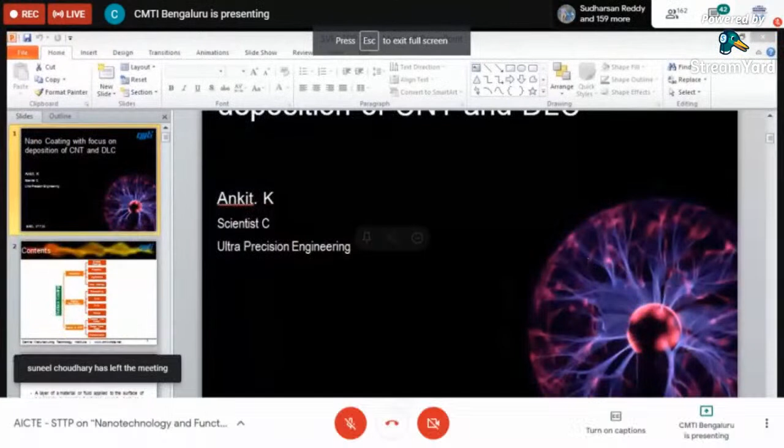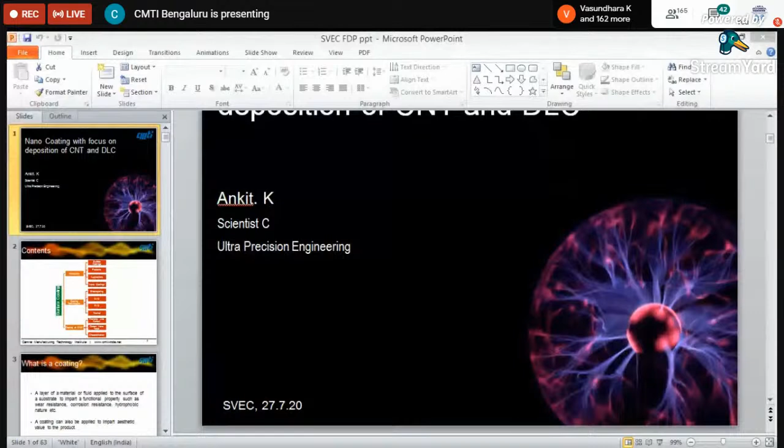Ankit sir, we are getting your presentation. Sir, we are able to see your presentation, sir. You can proceed, sir. Yes, sir. We are seeing your presentation. Go for full screen, sir. Full screen, shall I go? Yes, sir. Go for slideshow, so that it will be big. Now is it visible? Yes, sir.

Really sorry, we had to change the computer. There was some issue with the computer. Okay. Thank you, sir. Once again, I'm extremely apologetic for this sort of issue. Please don't curse me, because I know it's afternoon and we've had a good lunch. So anyway, without much further delay, let me start my presentation.

This is a presentation I gave a few weeks ago on a similar platform at your college. Thank you very much again for contacting me. This time I decided to go with an additional focus on the deposition of carbon nanotubes and diamond-like carbon. Graphene is the in thing, but on a mass production scale, CNT and DLC are actually at the forefront, more than graphene. And the applications that CNT and DLC have promised are a lot.

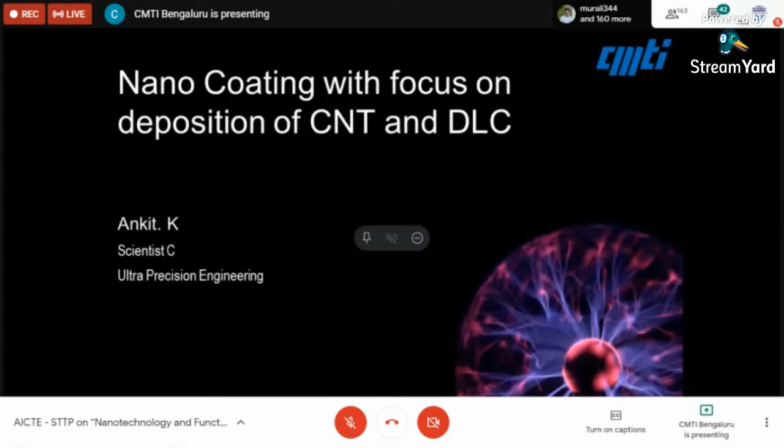DLC is now used in so many domains, right from high performance car engines to even a tiny thing like a screw, or machine tools. So these are the two things which we work on in our laboratory here, and I thought it would be ideal if I'm able to share with you my secret recipe of how to synthesize CNT and DLC.

So shall I start with my presentation? Yes, sir. Please carry on, sir. Please. Thank you very much.

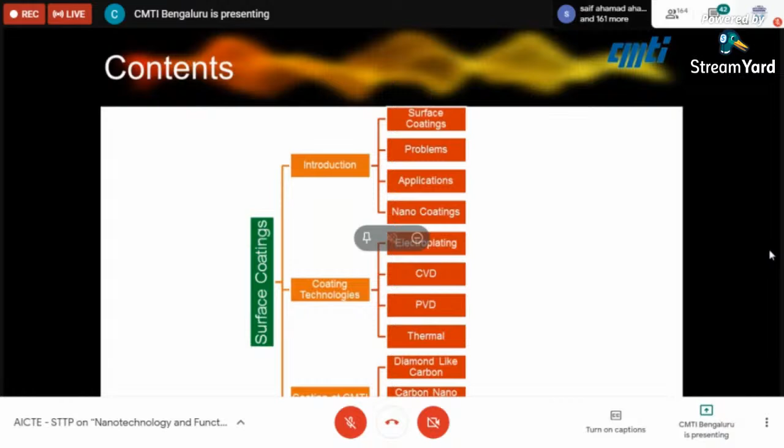So I'll be going with what is surface coatings, some sort of problems, applications, then why nano coatings are required, different technologies, and what sort of work that we do, especially with respect to DLC and CNT. So I would like to focus on this.

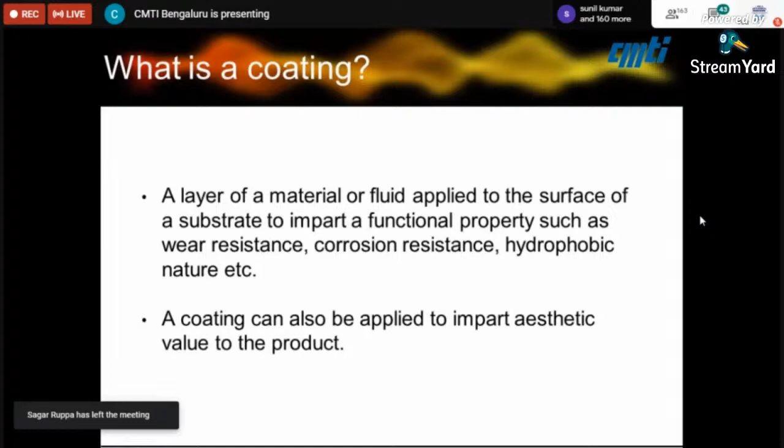And first of all, what is a coating? So if you apply any sort of material to a surface which gives you some sort of a good property, that is a coating. And it's as simple as that. Any thin material which is thinner than the substrate would be a coating. And coating forms a large part of a subject called surface engineering.

So surface engineering is basically a kind of science which deals with modification of surfaces in order to achieve a particular sort of chemistry, or a particular sort of physical property, or some sort of mechanical property which is essential for our final application. So the whole goal of surface engineering is modification of surface.

So let's say you want to make a surface quite smooth in order to improve the coefficient of friction. So that is one sort of property, and that can be used in bearings. Let's say you want to do a laser etching to get hydrophobicity. So that is another kind of property that you would be achieving using laser etching.

Or if you want to use plasma and bring about small modifications so that you can have some sort of cellular growth happening on the surface of a material, that is another kind of modification. So basically in all these three cases, you're modifying the surface, and hence the whole subject being defined as surface engineering.

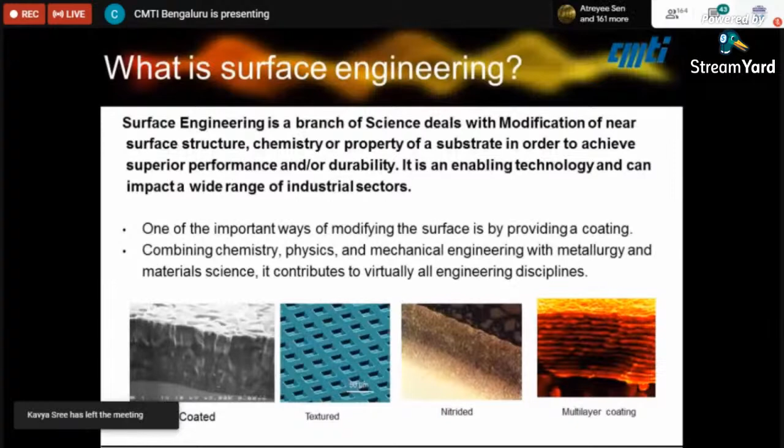So what advantages are we talking about? We're talking about improved corrosion resistance, improved oxidation or sulfidation resistance, improved wear resistance, reduced frictional energy losses, improved mechanical properties, or let's say delaying the fatigue or enhancing toughness,

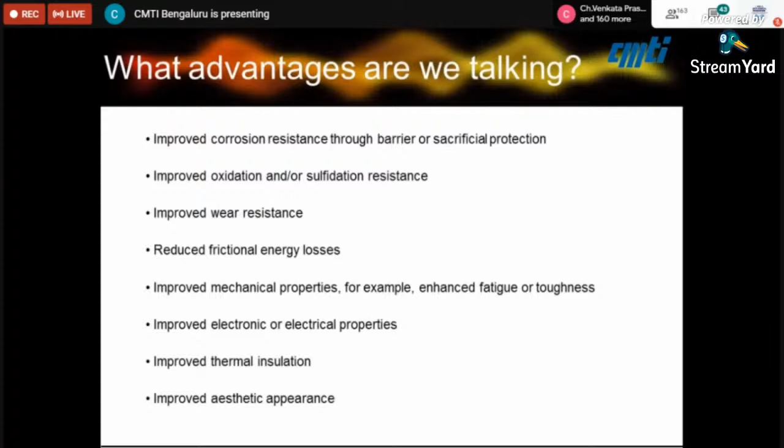improving the electronic properties. Let's say if you're able to engineer a very good band gap material using thin films, that's something very advantageous. Thermal insulation can be given, and improved aesthetic appearance.

Why does the surface actually damage? That is essentially because we expose it to various kinds of environments: chemical, thermal, environmental, and mechanical. Let me take an example of a race car, right? A Formula One car. What happens in a Formula One car is that your engine is a very high performance engine. The heat that is generated is very high.

So let's say the engine piston rings have to be coated with some sort of low coefficient of friction coating. At the same time, it should be able to withstand a lot of heat. So that is one way to have that. Then there is also a lot of wear and tear in parts. If you have seen a 50-lap race, you will find out that a lot of parts and components are being changed in an F1 race.

And that is because you have wear, you have abrasion, you have friction damages, so you change a lot of parts there. And sometimes there are certain races that happen in rain, and when it happens in rain, you have a problem of water in a lot of parts of your chassis or your wheels, between your brakes and your drums. So these are other issues that you will have problems with. So all these things can be sorted by coatings.

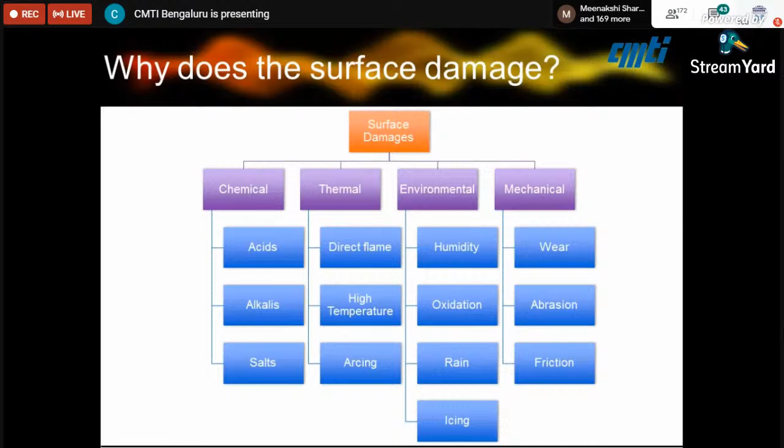And then in medical, there's a lot of work that goes on in body implants. And then you have the textile industry with thread guides, winding spindles, flattening rolls. And there are even certain guideways which use this. And transport also, as I told you. So there are a lot of places where coatings are useful.

And this is one small slide which shows you the different kinds of coating and the different regimes they are used in. Just to give you one example, welding, which is slightly thicker in nature, is used essentially in ship repairs. When you are at sea, you weld, take out material there, and then you apply it. Thermal spraying is very prevalent in aerospace turbine blades.

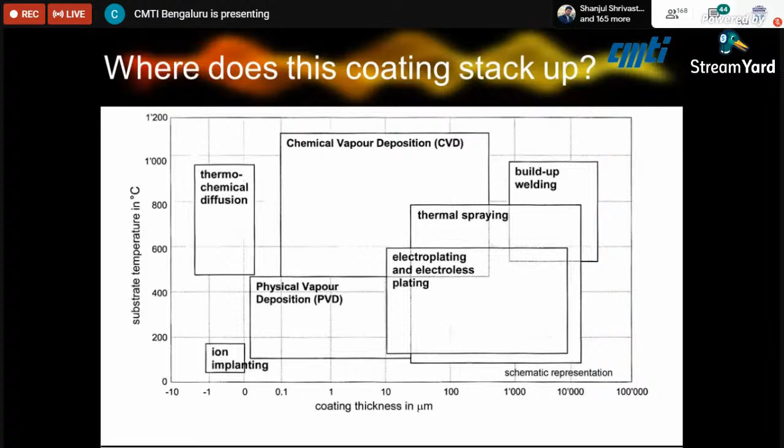So what are nanocoatings? Nanocoatings are coatings that are produced by using some components at nanoscale to obtain certain desired properties. You can make crystalline coatings. You can handle individual layer thicknesses. You can change the grain size, grain boundaries, play with it, and then create an interface which will then impact your final application. You can try adding a defect, or you can try removing a defect, which is very useful in making N-type or P-type semiconductor systems.

And then you can make a coating chemically inert, physically strong, those sorts of things. And you can actually make certain coatings which are kind of super coatings, which are not typically found in our conventional day-to-day life.

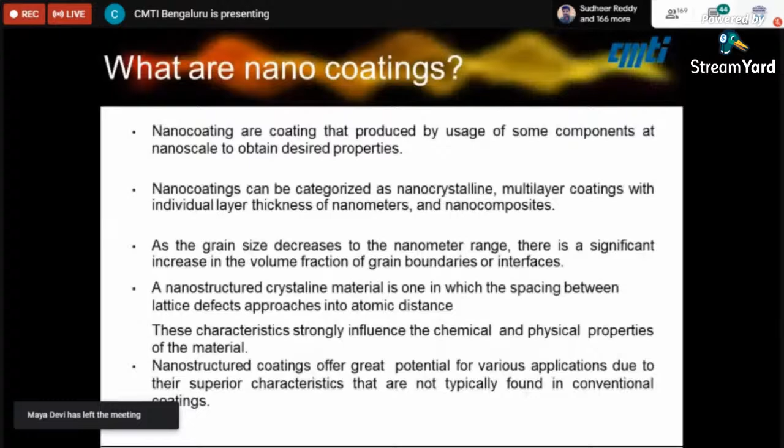So here is a small difference. One is a micron scale structure, one is a nano scale structure here. So I wouldn't go much into high contact tension. Today, though contact tension is reduced, you can improve your water repellence effect. You can also make it hydrophobic in nature, and then moisture can penetrate the housing because you'll still have certain gaps.

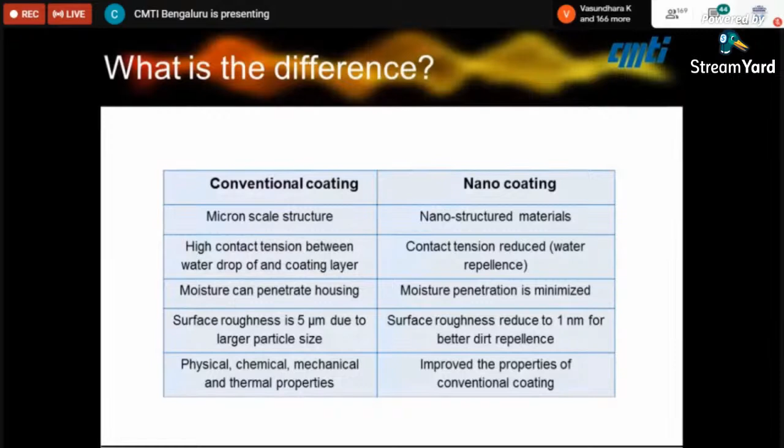Whereas in nano coating, it is atomic bonding or molecular bonding, and hence it's minimized. Minimized is actually an understatement. It's almost eliminated. Surface roughness, yes, you can reduce not only to 1 nanometer, it can even become a few angstroms. And conventional coating is slightly thicker. It goes up to even 150 micrometers in aerospace applications. And then you have the improved properties of conventional coating fields now.

So electroplating, we'll go with the oldest and time-tested one. What is electroplating? Electroplating is one process wherein you have a cathode and you put it in a bath, a solution wherein the workpiece is plated with another metal through a water-based electrolytic solution. So the metal ions are transferred and deposited onto a cathode. So it dissociates at the anode and then it goes and attaches itself to the cathode.

So you can do a lot of things. You can do a variety of shapes. The only drawback is that the disposal of the electroplating solution after it goes bad is very, very hazardous. You can do it on complex shapes, but when you do it on complex shapes, you actually have to sacrifice uniformity of coating. And as you know, hexavalent chrome plating is now being banned in the country.

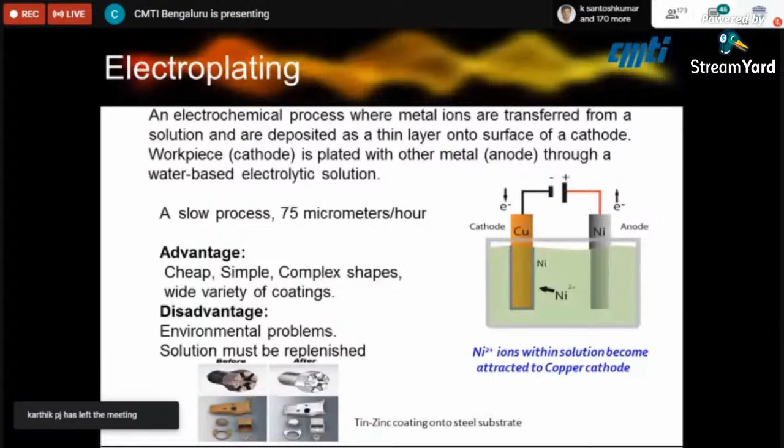So then comes the next generation plasma enhanced chemical vapor deposition. Now this is important for our talk today because when I talk about deposition of DLC and deposition of CNT, it is going to be using plasma enhanced chemical vapor deposition. So let's talk about what is CVD.

CVD, as I told before, is used in deposition of non-metallic and metal organic films. You can do several kinds of coatings - optical, super hard coating, protection, aesthetic - all usually deposited using CVD. So when I say gold color on watches, it doesn't really mean you coat titanium nitride or gold. There are certain chlorides you can use, gold chlorides or some sort of chlorides. But nowadays people have resorted to titanium nitride, which is deposited using PVD.

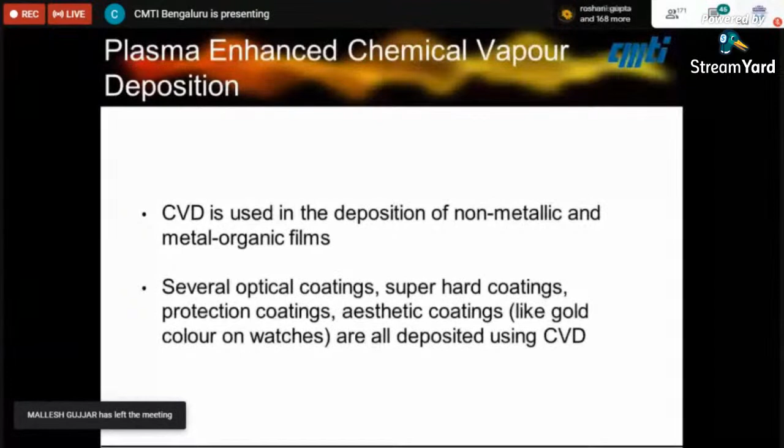So this is something which I've explained today, and that would be: first you have a chamber. Any CVD chamber, unless it's atmospheric pressure, would be in vacuum. You extract air from the chamber to the order of 10 to the power of -6 millibar and above.

Using either a cryogenic pump or a turbomolecular pump, which is backed by a roughing pump. When you use a roughing pump, it kickstarts your turbomolecular pump, and in turn, the turbomolecular pump can achieve very high vacuum. Once you achieve very high vacuum, you evacuate all the gases, including dust. So let's say if your coating thickness is about 500 nanometers and you have a dust particle of about 2 micrometers, then it's not going to serve the purpose. That's why you should go to very high vacuum.

And then later on, you have a plasma source. The plasma source for a PECVD is either a pulse DC, an RF, or a microwave source. You use a pulse source and plasma source, and then you generate plasma when you inlet certain process gases. With that, the gas enters into this vacuum chamber, and when the plasma is switched on, the gas starts dissociating. There is a chemical reaction which occurs, there is a dissociation that occurs, and then slowly these things start adhering onto the surface of the substrate. So one by one, they start adhering onto the substrate surface, and then they have a molecular binding in nature, and that's how you start depositing the material that you wish to do using a CVD process.

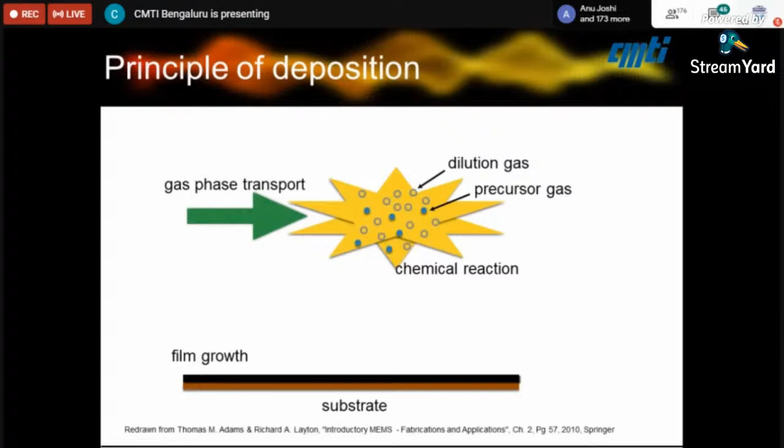Atomic layer deposition is a more finely controlled chemical vapor deposition, and it actually offers more precise control in terms of deposition, as it goes down to a few angstroms to a few hundred nanometers with much precision and very good uniformity. So the difference here is you would be using a lot of liquid-based precursors, which is then vaporized, and then you would be doing it. Of course, there are different machines having different setups, but technically speaking, atomic layer deposition, as the name states, is used for very, very low thickness deposition and is very useful in a lot of semiconductor applications.

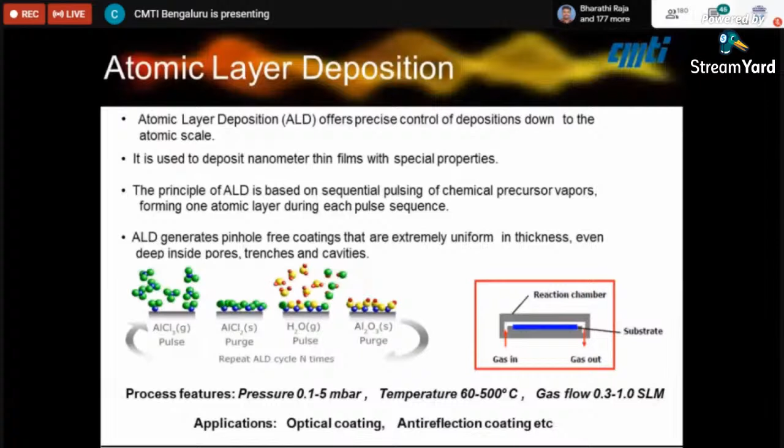Now, physical vapor deposition. All the cutting tools, metal-based ceramics, metals for temperature sensors, or maybe chromium for some sort of coating for protection, aluminum for mirror applications, are all deposited using physical vapor deposition technique.

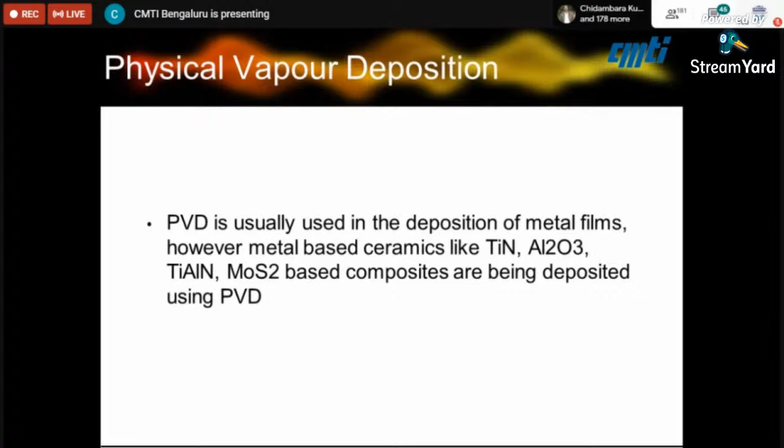Basically, one very famous methodology of physical vapor deposition is magnetron sputtering system. So you have a target, and what happens is you put in some sort of gas inside. The gas is ionized, and it bombards the target. The target etches out material, and this etching out of material in very, very small scale is called the sputter off phenomenon, and this sputtered off material falls on the surface of the place where you wish to coat, and then that happens to be a sputtered process PVD.

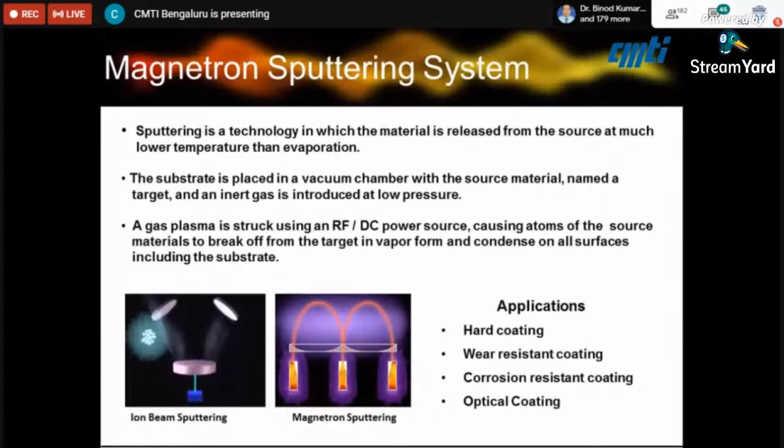As you see, the applications on the slide are for hard coating, wear resistance coating, corrosion resistant coating, and also for optical coating. So the principle of coating is something which I've already explained - you actually try to eject material from a surface using some means possible. When you eject that material, that ejection of these sort of atoms is called the sputtered atoms, and the whole process is called sputtering.

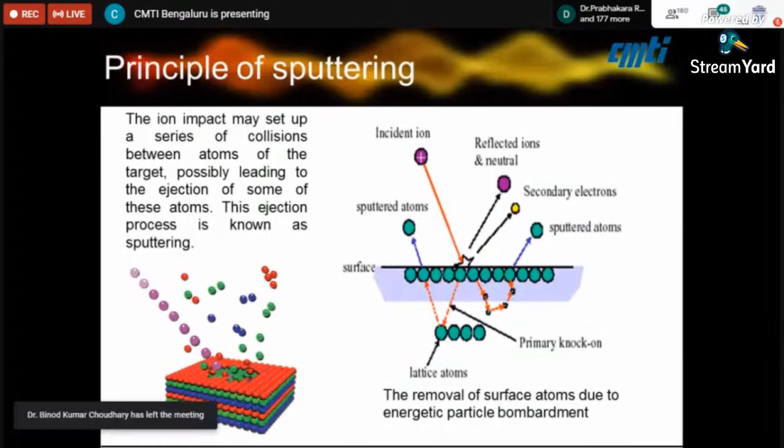This you will be able to simulate using either a molecular dynamic simulation, or some sort of Monte Carlo simulations can be used to find out the sputtering.

So the schematic is also pretty much similar to PECVD, or I should say they are anyway a sort of vacuum system here. The only thing is the difference in the plasma source. There you were using an additional plasma source of microwave. Here you would use DC. So that's the only difference. The rest, both the plasmas are going to be the same.

And you use specifically argon. Maybe you can use oxygen for creating an oxide, and nitrogen for creating a nitride. So this is reactive sputtering, but argon becomes your principal gas for letting into the chamber for creating a sputtering reaction.

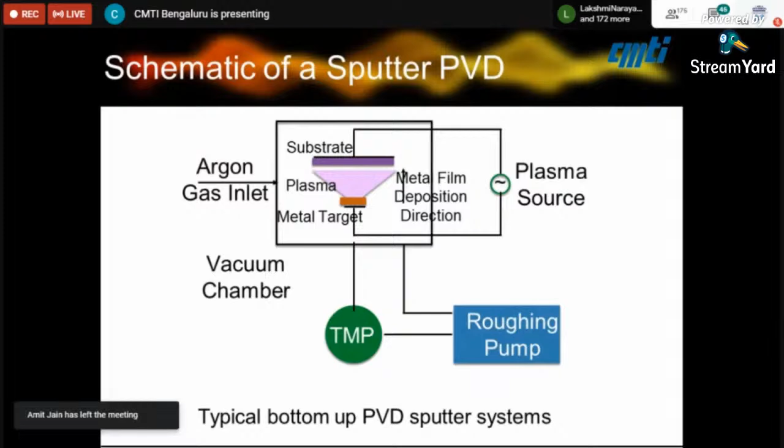These are the PVD and PECVD that we have in CMTI. We will come back to that later. And as you see on the screen, our PECVD is essentially set to make only carbonaceous materials, essentially DLC and CNTs.

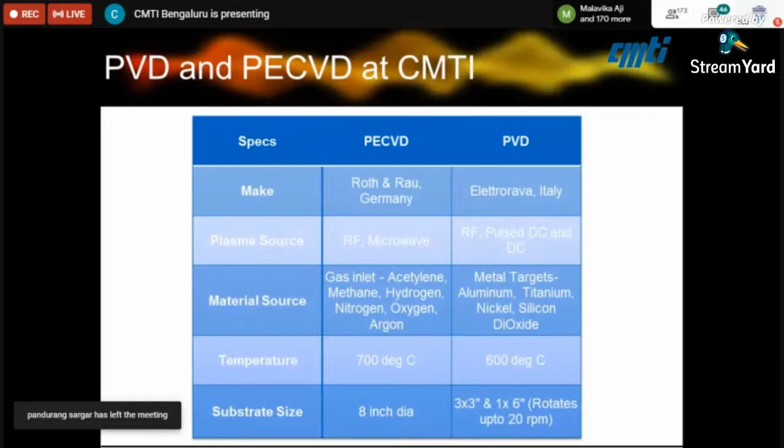Pulse laser deposition is also a kind of typical system wherein instead of using a gas and then ionizing it, you would rather use a laser. The laser would fall on a target and then it would remove material, and that actually gets coated on the material in which you wish to coat.

So basically you have a laser beam which hits on a target carousel. The carousel is rotating, and either you can have the laser beam at an angle or you can have the target at an angle, which removes the material from the target and then it deposits on the substrate intended to be deposited.

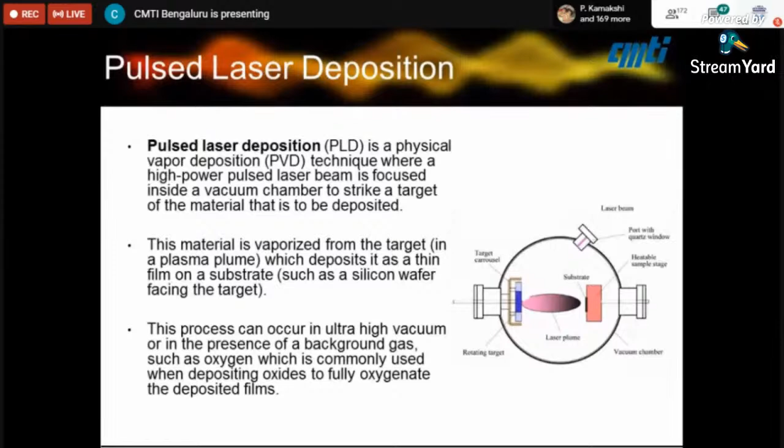So let me talk about some pros and cons of the CVD process. One is that you can achieve very high coating hardness, good adhesion, and a decent thickness of coating. But sometimes the CVD process is a high temperature process, and this could cause some sort of thermal expansion and would end up in peel off of material.

Limited range of materials can be coated. You will have to work out a lot on this. And there are environmental process concerns about the process gas which is removed or exhausted from the chamber.

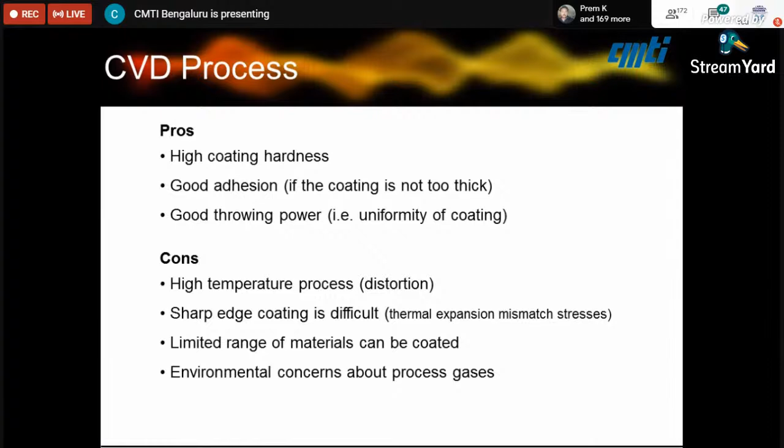Similarly for the PVD process, it also has excellent process control, low deposition temperature. You can create dense and adherent coatings. You can also handle stoichiometry. So, let's say if you have a TiN coating, you can play around with the titanium content or the nitrogen content in the titanium nitride, and then get your own stoichiometry for any application possible.

So yes, as any other vacuum system, vacuum processes have a slightly high capital cost. You have a limited component size. Of course, now you can go to at least a meter or two these days.

Coating rates are relatively low. When I say relatively low, when you're depositing titanium nitride or any sort of ceramics, the deposition rate lowers, and the time to coat is a little longer. Which means to say poor throwing power, you can say.

You need to bias, but it's pretty much the same because it depends on the density of your target material. So as you recall that slide from the sputter yield, it also depends on that, how much time it takes to deposit.

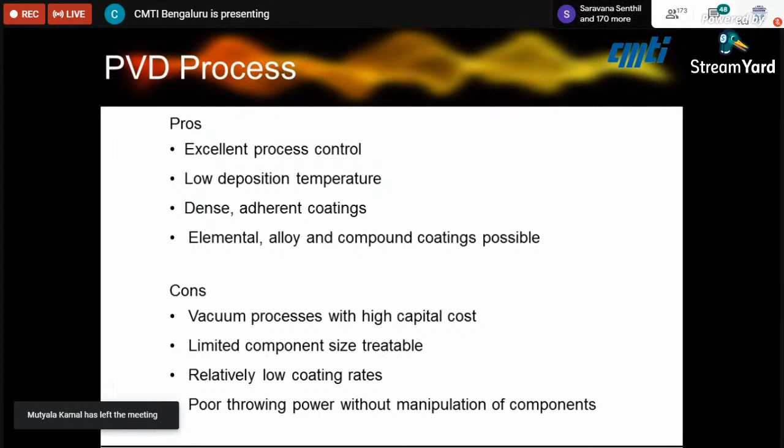So what are the good things about these sort of nano coatings? Good things are that you can have very controlled deposition from 0.5 angstroms or even lower to about 5 micrometers. You can engineer your film to whatever hardness you wish.

You can give a better wear resistance. You can define your optical properties better. Right from your sunglasses to the anti-glare glasses that you wear today, all have nano coatings. You have very good surface adhesion, and it is very much environment and operator friendly.

What are the bad things is that you need to have subject knowledge, and you really have to be very good with the basics, understand the chemistry of it, understand the physics of it. So when we put it in an industry perspective, you need somebody who's not only skilled but also suitably knowledgeable in this field.

So usually you will find that a lathe machine or a milling machine is operated by either an ITI fellow or at maximum a diploma person. But here you need a good, well-experienced person in this regard.

You can't deposit really high thickness films, otherwise the film tends to peel off because of the stresses induced in the film. So this is another technical reality of this.

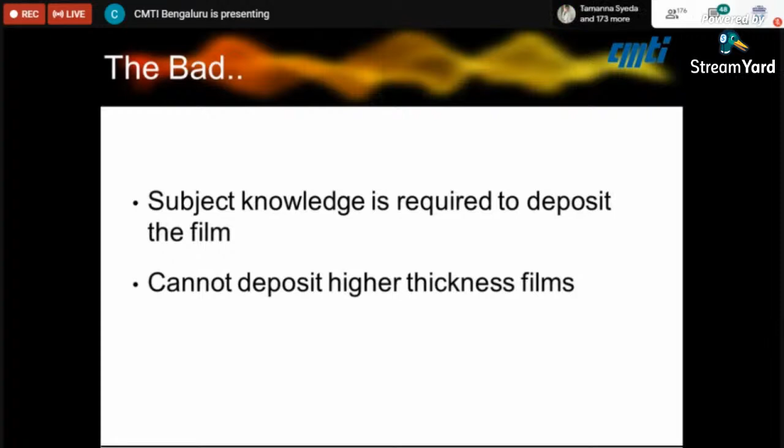So what is the ugly part of it is that the initial investment is very, very expensive. You require a clean room. Maintaining a clean room is a very, very tough task.

And you have to give 24-hour power, 24-hour current, water chilling. So all these things are required for this. And then scalability is certainly an issue when it comes to deposition techniques such as pulse laser deposition. So that scaling is quite a challenge.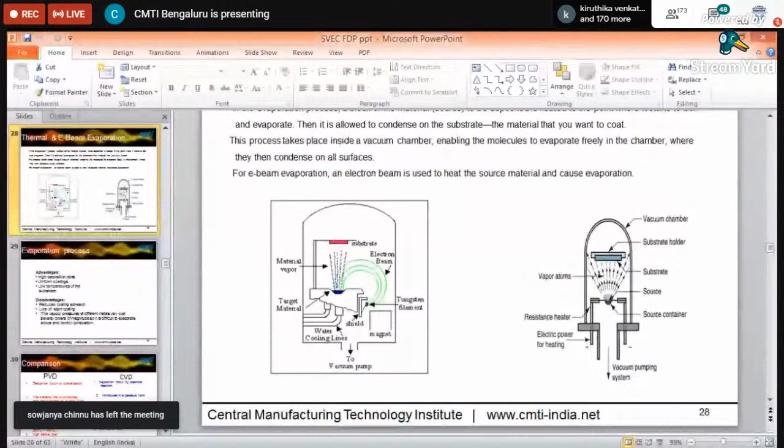Well, I am Dr. Dilip Kumar Biswal. I'm very sorry, I do not work on this subject, so I would not be of any use to you in this area of yours. So I really do not know what that coating is. I don't want to give wrong information which would hamper your research.

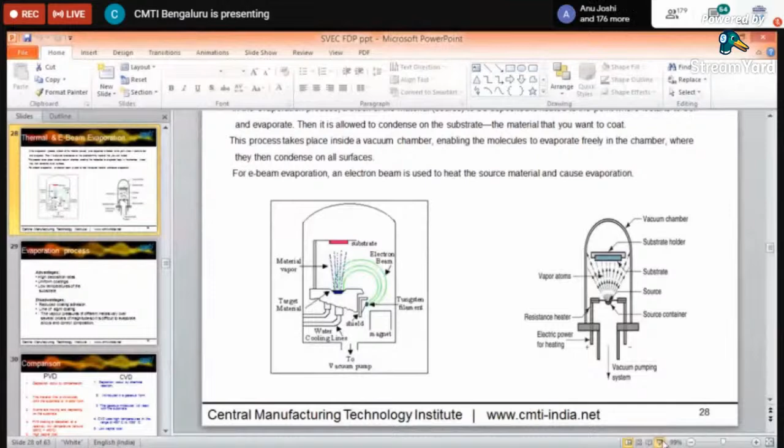So let me continue with thermal and E-beam evaporation, which is also part of a PVD process. As simple as it is, you heat something, the material melts and gets deposited. This is thermal evaporation. Thermal evaporation is just like heating water in a vessel at home, or in simple terms, let's say you have an incandescent bulb with a tungsten filament. If I put some gold or copper inside the tungsten filament, it has a lower melting point than the filament, and it would immediately evaporate and start depositing everywhere. So that's basically thermal evaporation.

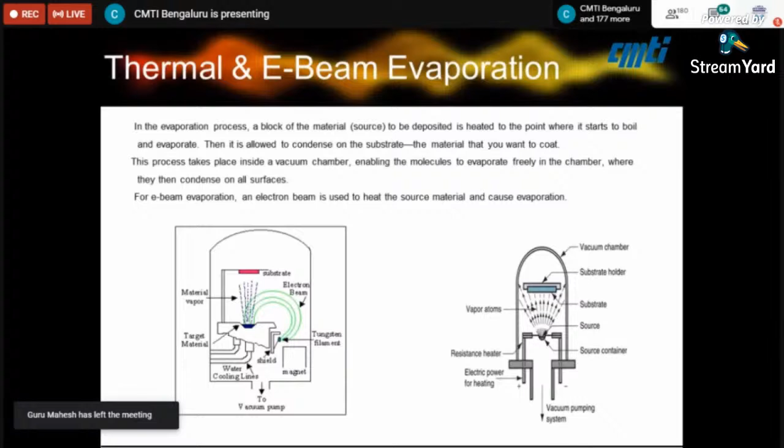And E-beam evaporation is just, instead of using heat, you would use an electron beam gun. And instead of having a thick material, you would use some sort of crystal form or powder form of material, and then use the electron beam gun in order to evaporate the material. So evaporation has very high deposition rates.

With E-beam evaporation, you can do anywhere from a semiconductor process of about a few angstroms, and you can even do aerospace turbine blades, single crystal columnar growth coatings using the evaporation process. So that's possible with that.

Thermal evaporation doesn't have great adhesion as compared to E-beam evaporation, but both are line of sight coatings, which means that if you have an object coming in between, then it's going to coat the object and not the thing which is behind it. Something like a solar eclipse, lunar eclipse concept, if I'm correct.

Also, it depends on the vapor pressures of different metals. Then again, you have to keep your chamber in vacuum, and that would be nice in order to get very good uniform coatings with low contamination in this process as well.

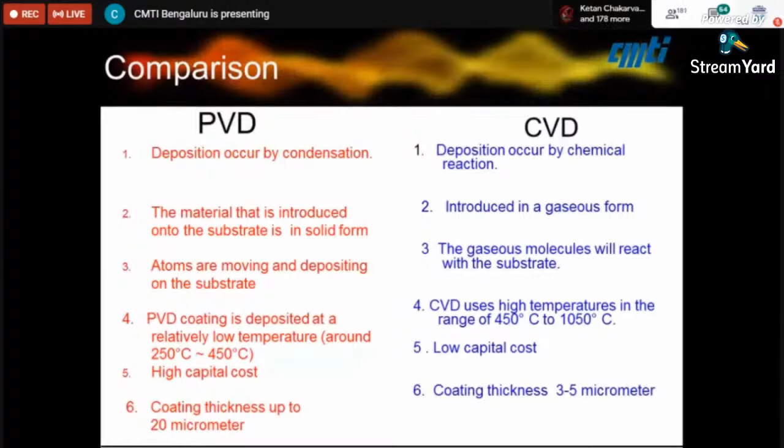Low capital cost is something when you use furnace heaters, and that would be quite cheaper. An atmospheric coating would be really low cost, whereas a system where you require vacuum would be a high cost system. So this is a process comparison. Well, I have already given you the entire chart in the first slide.

Today people go with a lot of technological advances. So I'll just put materials in perspective. Thermal evaporation is used for low melting point materials, E-beam for both metals and dielectrics. A lot of people do tantalum pentoxide, silicon dioxide for semiconductor applications. You can even do some things like CoCrAlY or any MCrAlY methodologies in E-beam evaporation for aerospace coatings.

Sputtering is used for both metals and dielectrics, nitride and oxide coatings. PECVD: dielectrics, if you're doing SiO2 or SiN, or even you can do graphene, carbon nanotubes, so on and so forth. And LPCVD would be mainly dielectrics.

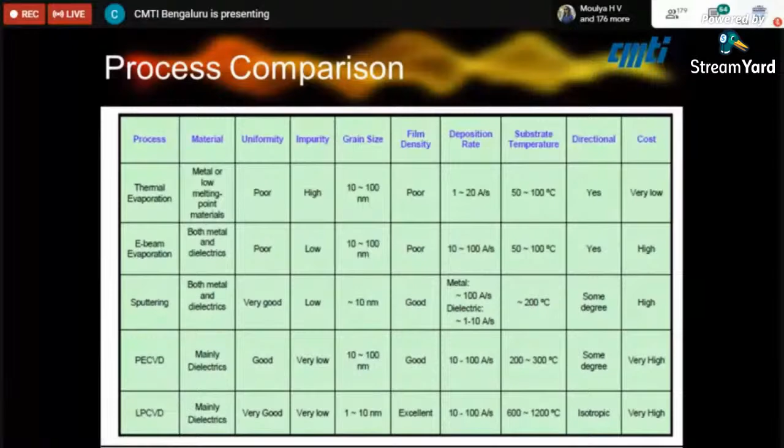Thermal spray is another way: you heat up a spray gun, you accelerate a material, you melt the material that passes through the spray gun and then you coat it on the substrate. The substrate is not usually molten. It's basically only the powder or the wire that you feed, the feedstock, that would actually be molten. The energy source is either a flame, an arc, a plasma, or you can combine oxygen and fuel. Very high temperature can also be used for thermal spray methods.

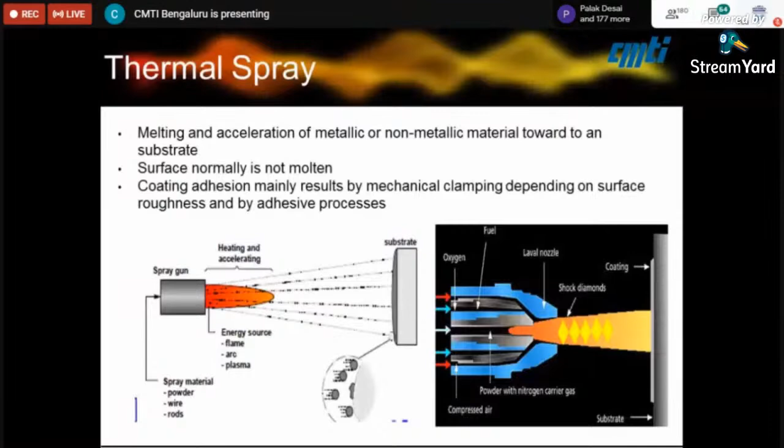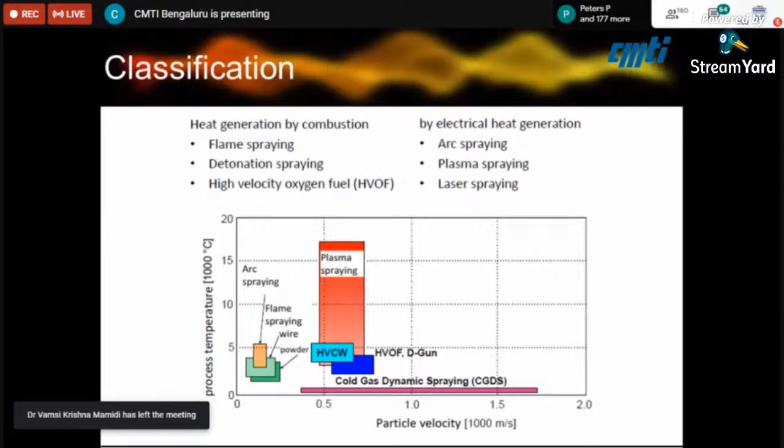So the classification is something like this. Process temperature is very high in plasma spraying, but it's just on the spot for doing a plasma spray. HVOF, or high velocity oxygen fuel, is another kind of spray-based coating system. It uses a very high velocity, and high kinetic energy is used here for bonding. It's noisy, and that would be with any spray coating technique. You need a separate chamber to undertake any sort of spray coating.

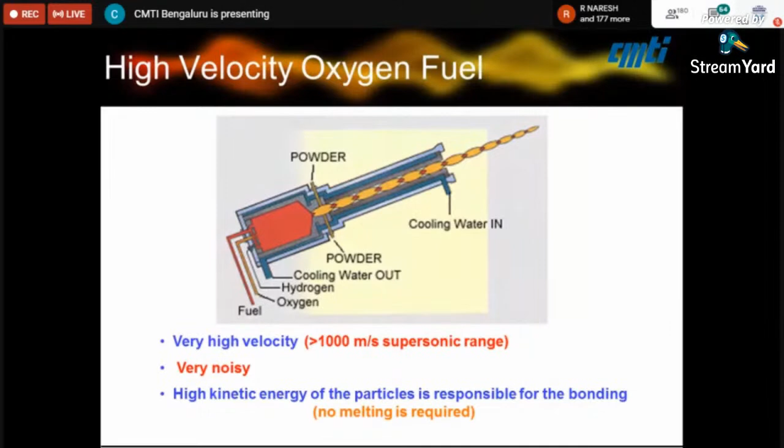These are the applications. You can use it for repairs, thermal barrier coatings for aerospace applications, corrosion, wear protection, especially hot gas corrosion, of course in aircraft turbine blades, but also in oil and natural gas.

So for nano coatings at CMTI, we work with DLC. Just to give you an introduction of what DLC is. Okay, before I start with DLC, this would be kind of my last part. So I'll again give a break here, and if you have any questions, you can ask me here. Again, 2 to 3 questions.

So the first question is rigid or flexible substrate? You can do both. I have done both using PVD. I have deposited on a flexible substrate as simple as an OHP film, and rigid is something which we always do. So both can be done. Do you have any other questions before I start with the next section?

Sir, one question is in the chat box, sir. Yeah, I think I've already answered that. No, the last one, I don't know which relates that. Rigid and the flexible substrate. That is the question, sir.

You can use both. I understand that. Can you use rigid or flexible substrate for a coating? I would say you can use both. We have done Kapton coating on a Kapton substrate which was flexible, coating on an OHP sheet which was flexible in nature, or cellulose acetate which was flexible in nature. Rigid is something we do all the time. We have used silicon, we have used ceramics. You can use that.

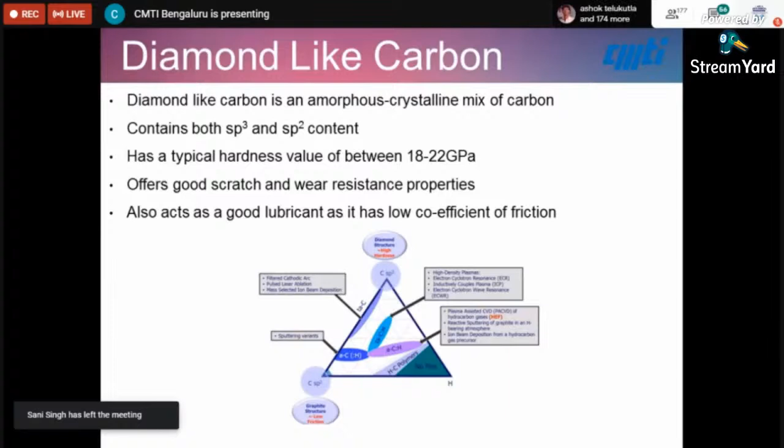So these are the two things which we do, diamond-like carbon and carbon nanotubes. So what is diamond-like carbon? It's neither diamond nor amorphous carbon, it's something in between, which means that it's not going to be as hard as diamond or as soft as carbon. The properties are going to lie somewhere in between, and hence it contains both sp3 and sp2 hybridization. Typical value is between 18 to 22 GPa. It offers very good scratch, wear, and even IR optical properties, and also is a very good lubricant and has a low coefficient of friction.

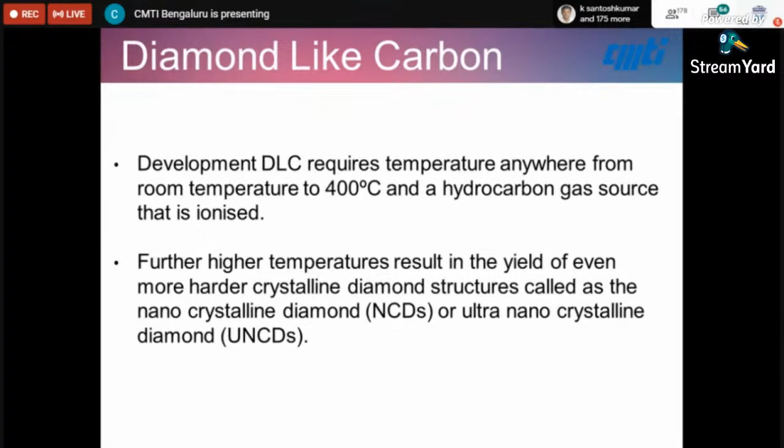So typically, DLC requires temperature anywhere between room temperature and 400 degrees centigrade, and you need to use a hydrocarbon gas source, which is ionized. At further temperatures, you would yield harder crystalline diamond structures called nanocrystalline diamonds or ultrananocrystalline diamond. So how do you deposit DLC? Now this is the most important part of this presentation.

You can choose a hydrocarbon gas, let's say methane, ethane, or acetylene, and introduce it in the chamber. Then you require a carrier gas or a dilution gas, hydrogen, helium, or argon. We prefer hydrogen, and methane or acetylene as the hydrocarbon gas. We would combine these both together in the chamber and then try depositing DLC. So you have the vacuum chamber in which you let in these gases. You can subject it to 200 or 300 degrees, whichever temperature you like, and then use plasma using RF, microwave or pulsed DC. Then you would ionize these gases and start depositing.

So is it as easy as I say, or does it seem? Yes, it is extremely easy to do that. However, you have to get your hydrocarbon to dilution gas ratios quite correct. These ratios depend on the type of system you have, the size of the system, and what pressure it can hold. It's quite simple to deposit DLC. But to get it to a particular kind of hardness value or a crisp nature, that is when you really need to have a lot of knowledge on how the film is being formed.

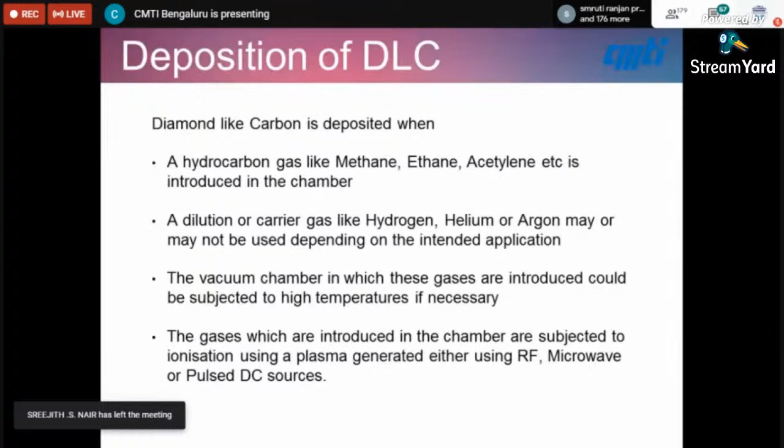Applications are so that you have higher hardness coatings, abrasion and scratch resistance, chemical corrosion resistance, and optical coatings for thermal imaging. These are some examples that we have done here: we put it on a surgical knife, a cutting tool insert, and also germanium wafers as IR optics.

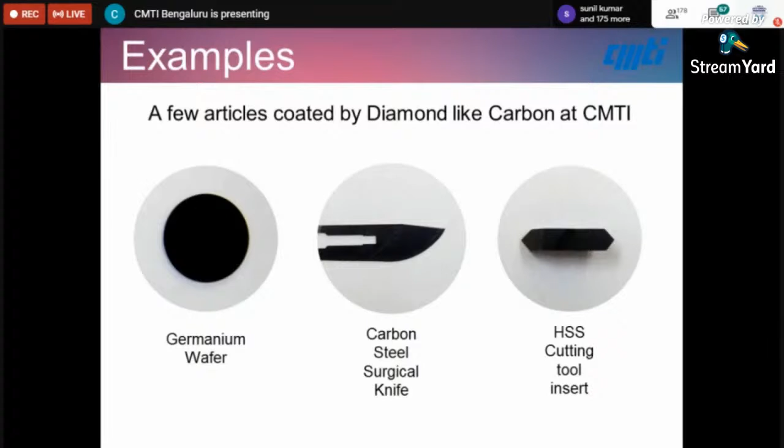Next, we will go to carbon nanotubes. Carbon nanotube is also another allotrope form of carbon. A single layer of graphite, when rolled into a tubular shape, forms a carbon nanotube. So let's say you have a block of graphite, you peel off one layer and start rolling it; then it becomes a carbon nanotube. They are essentially available as single-walled and multi-walled nanotubes.

It's something like rolling leaves to smoke. We call it here a beedi, so it's very similar to that. You actually roll it. Not that I promote smoking. Smoking is certainly injurious to everybody's health, but to think of how this whole thing gets rolled into a carbon nanotube, that's one of the best analogies I can give you.

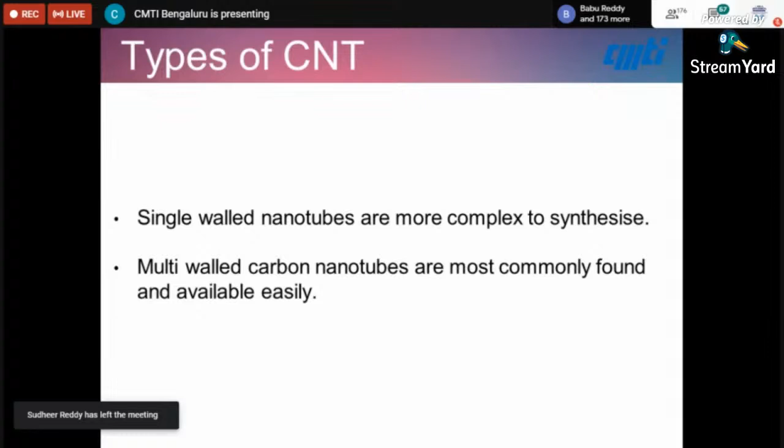Types of CNTs: single-walled carbon nanotubes, dual-walled carbon nanotubes, and multi-walled carbon nanotubes. Making single-walled carbon nanotubes is very complex. You need very high temperatures, greater than 1100 degrees. Whereas multi-walled carbon nanotubes you can start synthesizing even at 550 degrees centigrade, and those are the most commonly found and most easily produced carbon nanotubes.

So what are the requirements to synthesize carbon nanotubes? This is quite important. First of all, you need to keep ready a vacuum chamber which can go up to temperatures greater than 500 degrees centigrade. Then you have a hydrocarbon gas, like methane, acetylene, or ethane, and then a dilution gas such as hydrogen, nitrogen, or ammonia in specific ratios.

Typically for growing CNTs, the ratios of hydrocarbon to dilution would be 1:3, 1:5, 1:8, 1:12, and so on. And as I already said, multi-walled carbon nanotubes are more easily synthesized as per the procedure that I'm going to share.

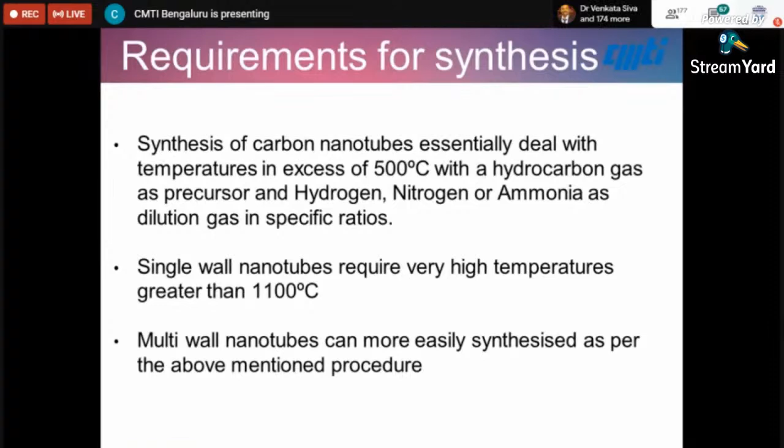First and foremost, you have to deposit a thin layer of a metal like nickel, iron, or cobalt, preferably less than 10 nanometers. This is called the catalyst layer, and you deposit it using a sputtering system. Then you take it out from the PVD system and put it into a vacuum chamber, preferably a PECVD, and heat it to about 500 degrees. You introduce hydrogen and ionize it using a plasma.

What happens is that these metallic films start breaking, partially because of the different surface forces that act on the film. They start coalescing, forming globules, and then very small islands. This formation of islands is called nucleation, and it is very important. This is the preparatory step to start depositing CNTs. The better the nucleation, the better quality CNTs you will be able to achieve.

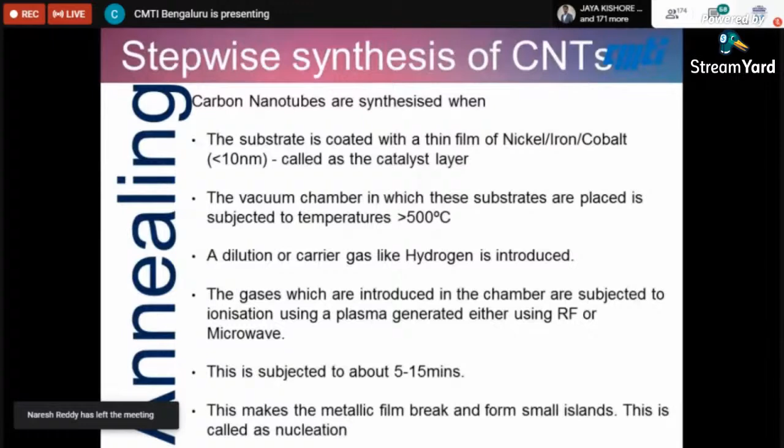And here comes deposition. Once you have nucleated, the same process is run. You already have hydrogen inside. Methane, ethane, or acetylene is also introduced in the chamber. The temperature is maintained more or less constant. You again ionize it using plasma, with either an RF or microwave generator, and allow the process to happen for 20 to 120 minutes. Then you will find that you have started synthesizing CNTs.

The major difference between carbon nanotube and DLC deposition is the introduction of a metallic catalyst layer, which is then annealed. Otherwise, the process is very similar, apart from the change in dilution ratios. Essentially, you have more hydrocarbon gas when depositing DLC, and far less hydrocarbon gas when depositing CNTs.

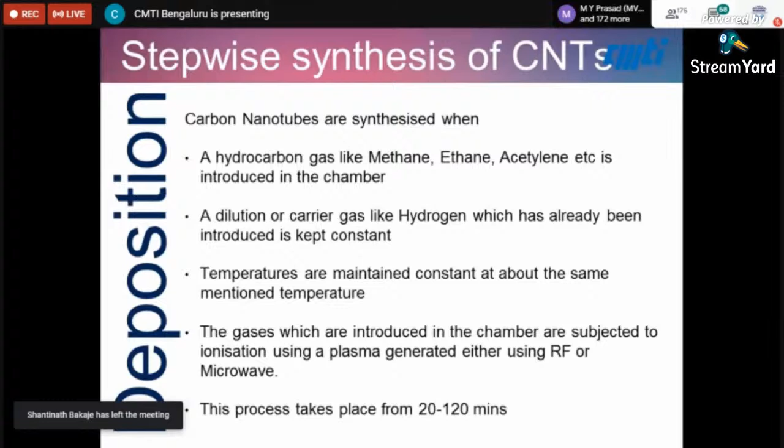This is a growth model. If you have sprinkled a nanometal powder, it will be three-dimensional in nature, and over that you will start growing the CNTs. Whereas if you have a flat thin film and you put in a carbon gas, it starts pushing the metal to the top and forms the cap. That is the tip growth model. The metal moves up, and from there the carbon nanotube starts growing from top to bottom.

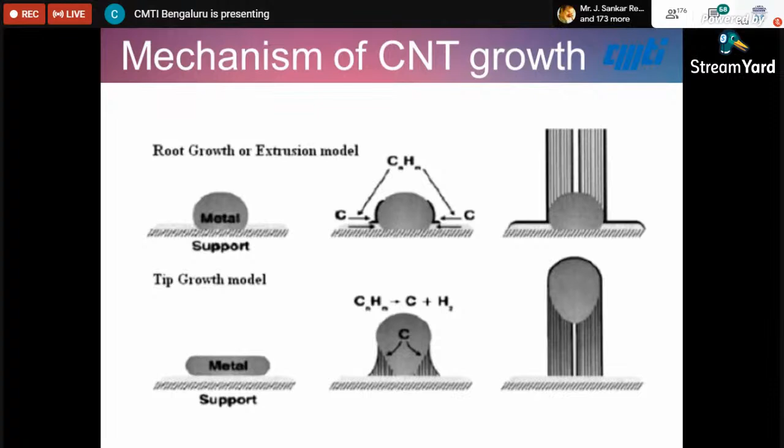So properties. Single wall carbon nanotubes are specifically preferred for electronic applications, as they can switch properties between conductor, semiconductor, and even metallic based on the chirality. Single wall carbon nanotubes exhibit a phenomenon of ballistic conduction, or a conductor along the wall and insulator across.

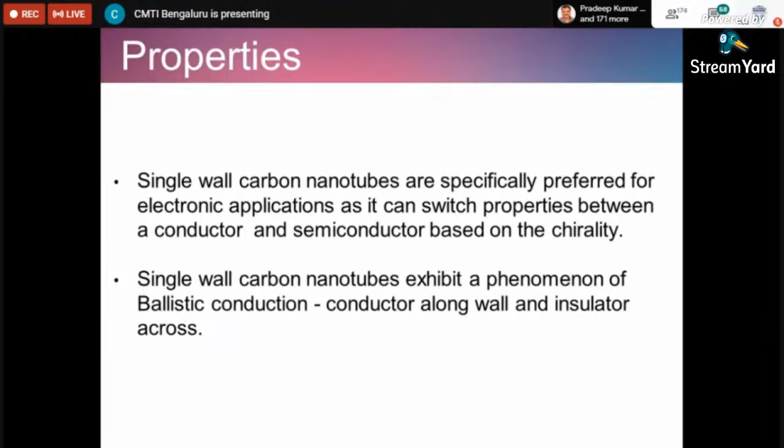So this is how the chiralities look. If you observe, see the edge termination. It is zigzag in nature. See, this is zigzag, so hence this is zigzag. Anything which is not uniform is called chiral, which is undefined chiral. And if you see an armchair, this is a seat, and this is your arms of the chair. So this is called the armchair configuration.

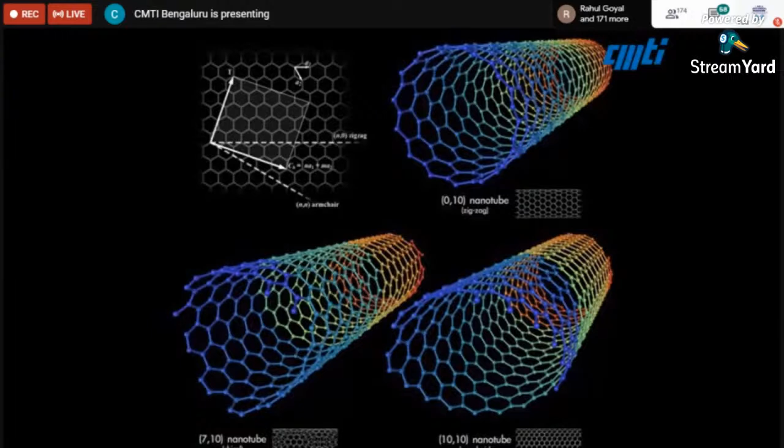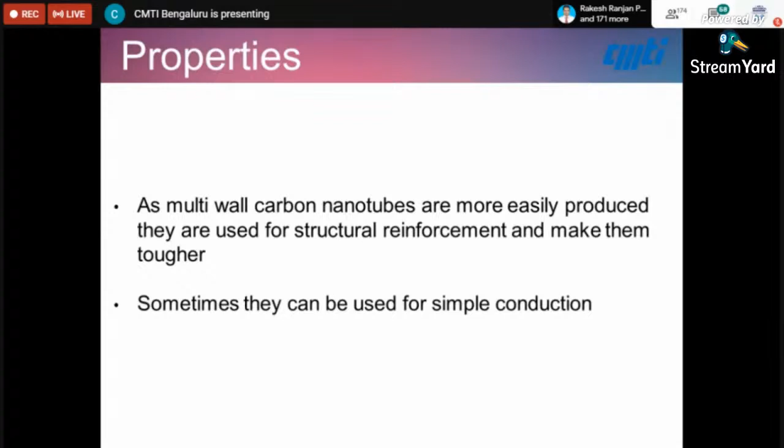Carbon nanotubes are more easily produced as multi-wall carbon nanotubes, and they are used for structural reinforcement, which can make materials tougher if you use them at 1% or 2% by weight. And sometimes they can even be used for improving conduction in a material. So these are the properties. You should find this in any literature. And obviously these mark the tremendous, significant properties of the carbon nanotubes.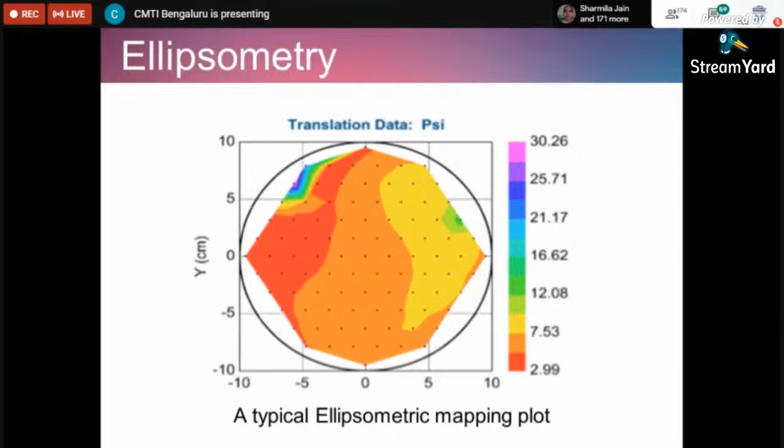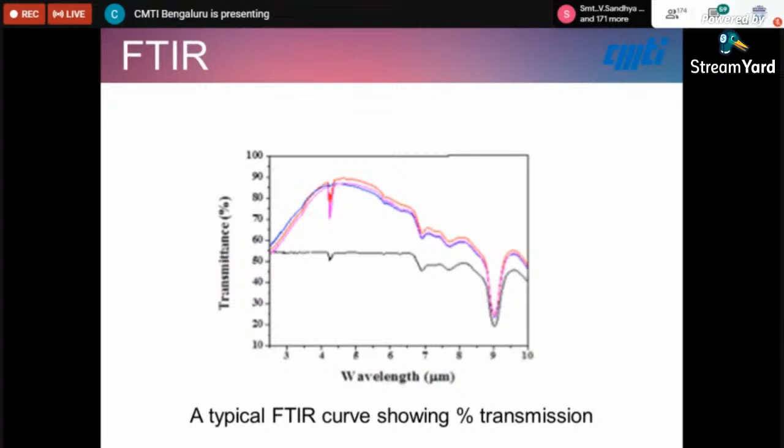So the question: which synthesis process is good for industrial purpose for synthesizing graphene in larger quantity? If you want a continuous film, PECVD would be ideal. And there are other furnaces, again CVD based, which are useful for synthesizing graphene in larger quantity. That's the only way to do it at the moment when you're talking about large quantity.

Otherwise, there is one more methodology, a chemical based method, wherein you put in potassium sulfate, add some graphite flakes, leave it overnight, then stir it in sulfuric acid for a while, and then you start preparing multi-layer graphene. That is also a very good chemical method to synthesize graphene, and it is typically used for making membranes for water filters.

Thermal stability of nano coatings, maximum temperature it can withstand, and duration of coating. That depends entirely on the type of coating. Let's say you're doing MCrAlY, where M stands for any metal, or CoCrAlY coatings, it can withstand up to 1100 degrees of cyclic oxidation testing. And that has to clear a minimum of many thousand cycles in order to prove that it can be used for aerospace.

It will tell you that in this material there is element A, element B, element C, or element D. You actually need both in order to qualify a substance. So there is no particular advantage, you need to use both.